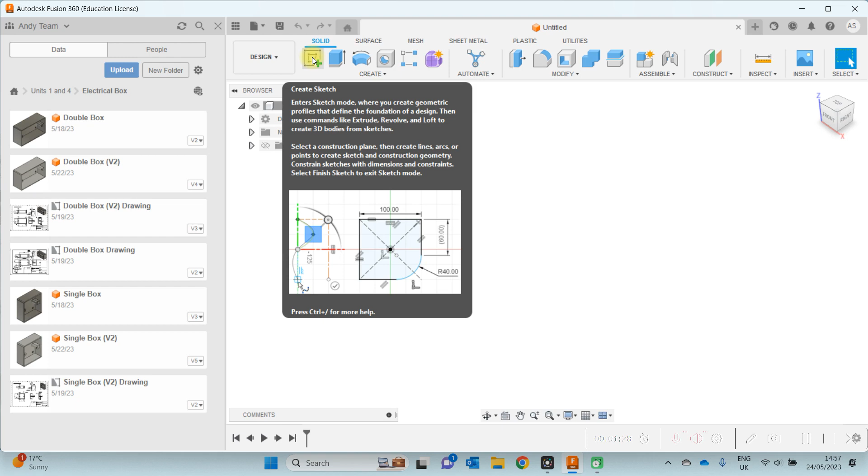So we're going to begin with the general outside geometry of the backbox. I'm going to be referencing the drawing as I go through this video, as I have the drawing in front of me here. So we're going to start with a sketch, and we're going to select a plane to sketch on. Now, with reference to the drawing, I know that the overall length of the backbox is 147 millimeters and the overall height is 50 millimeters. We'll look at the depth of the backbox in a moment.

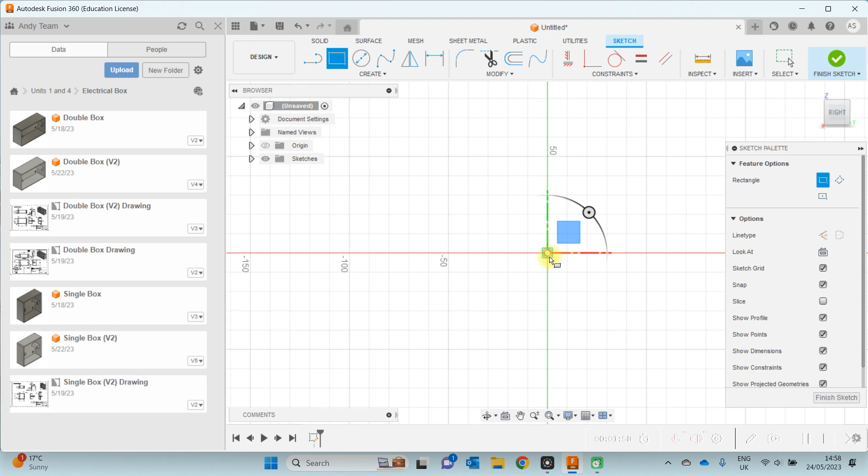Taking a rectangle then, I need to create a rectangle of length 147 millimeters. I type the dimension for the length in the box, and when I press Tab, I can input the dimension for the height, so 50 millimeters. Once I've created the outline for the front face of my backbox, I can click Finish Sketch.

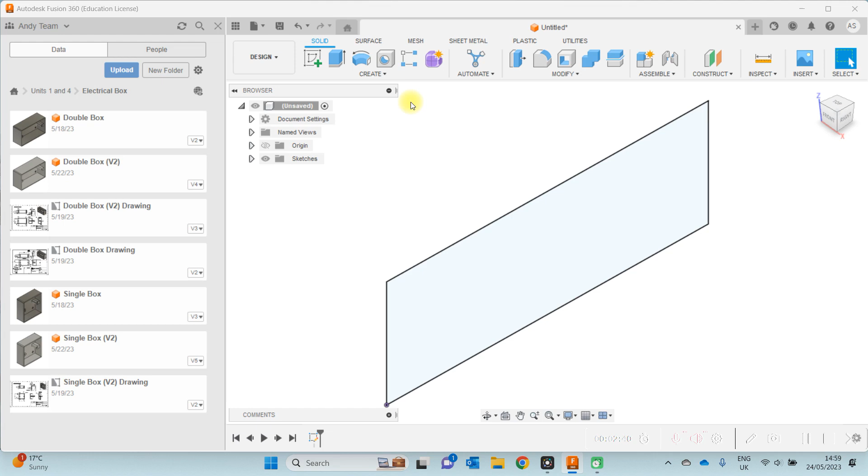Now the next step then is to extrude the thickness for the outside of our backbox. I'm going to use the extrude function, and I'm going to drag the arrow in the direction that I wish to extrude. Now with reference to the drawing, I know that the overall depth of the backbox in this particular view is 86 millimeters. So once again, I'm going to input 86 and hit enter.

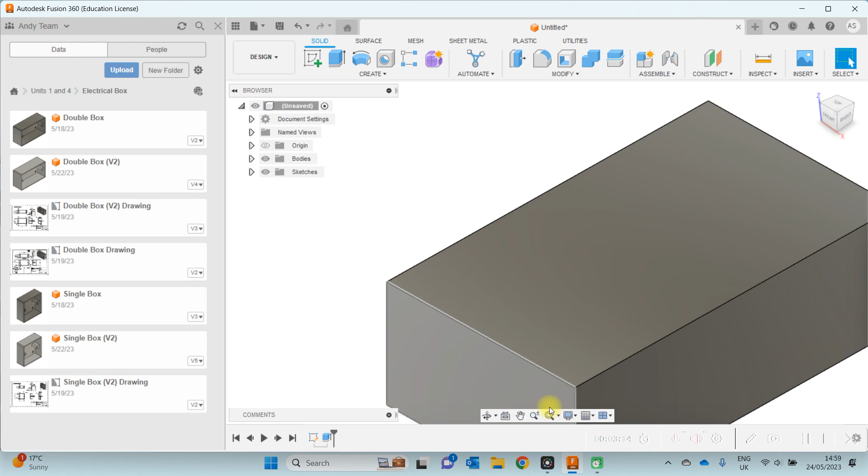So what we have so far is relatively basic, but it's the outside or the starting point for our electrical backbox. The next feature I'm going to do is add a thickness to the walls of this backbox, and there's a number of different ways that you can do this. One way might be to use the shell tool that we saw in the previous video, but I'm going to use an extrude cut function just so that I can demonstrate some other features as we go along.

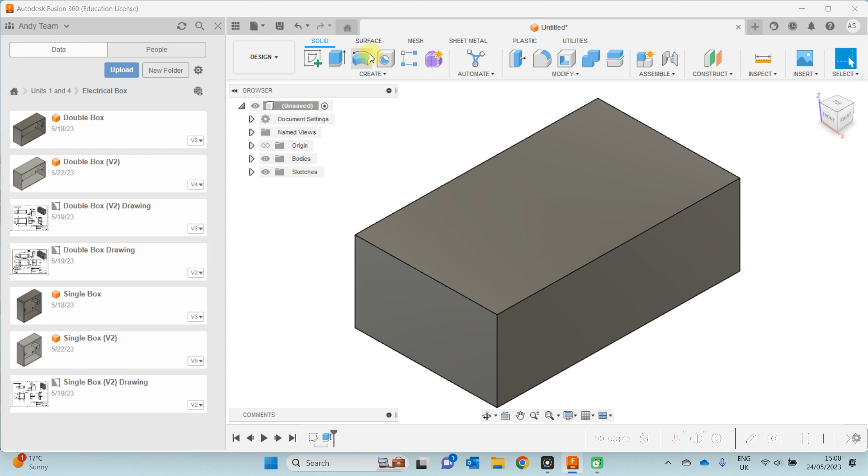So I'm going to sketch, and I'm going to sketch on the top face of the cuboid. And when we do this, you'll notice that the geometry reorientates. Now I'm going to draw a rectangle, and I'm not going to define any dimensions, so I can draw this anywhere in space. Because the important dimensions for me here are that we need to specify a thickness on each face of 3 millimeters. We're essentially going to create a 3 millimeter shell, but we're going to do this using extrude cut functions rather than the shell function.

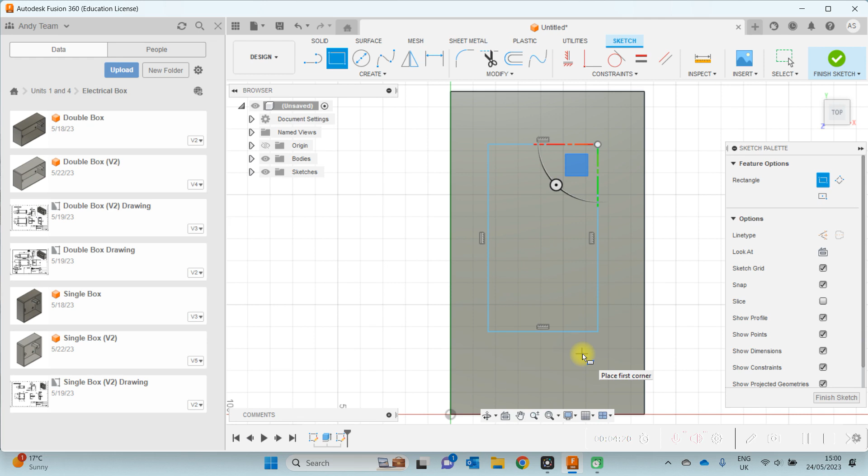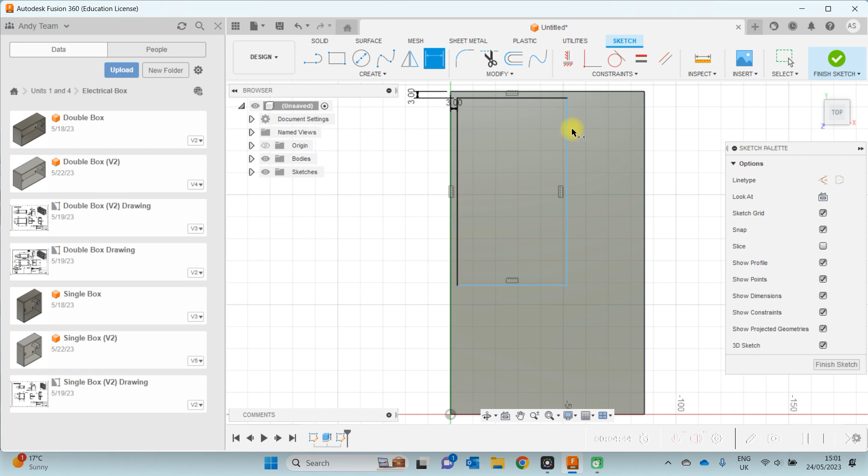So I'm going to dimension my first face, so between the side of the rectangle and the side of the electrical box, this distance here is 3 millimeters. I'm going to select the next face and the outside of the box, once again 3 millimeters, and I'm going to repeat that for the remaining two sides.

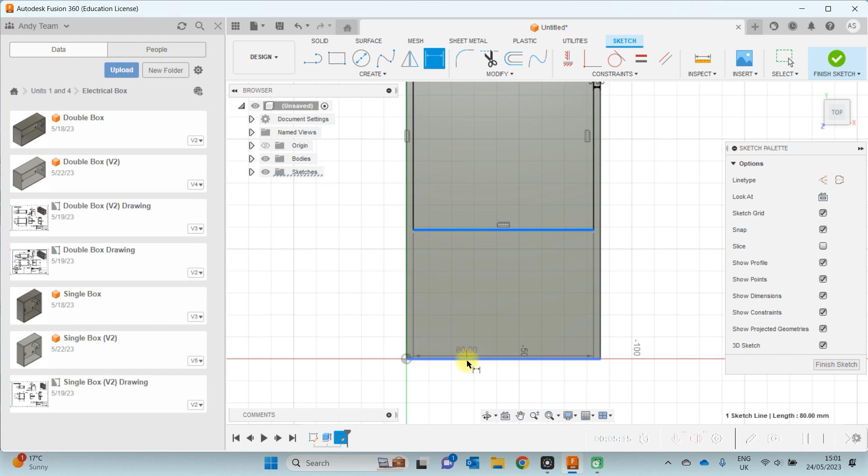Now it doesn't matter if your dimensions overlap the model that we're creating, as they're going to disappear once we extrude this object. So finally, I'm going to pan the object, I'm going to hit Escape to return to the previous tool, and I'm going to specify my final dimension.

Okay, now I'm going to finish the sketch because we've got a fully constrained rectangle there, and I'm going to orbit the shape so that we can see visually the sketched surface.

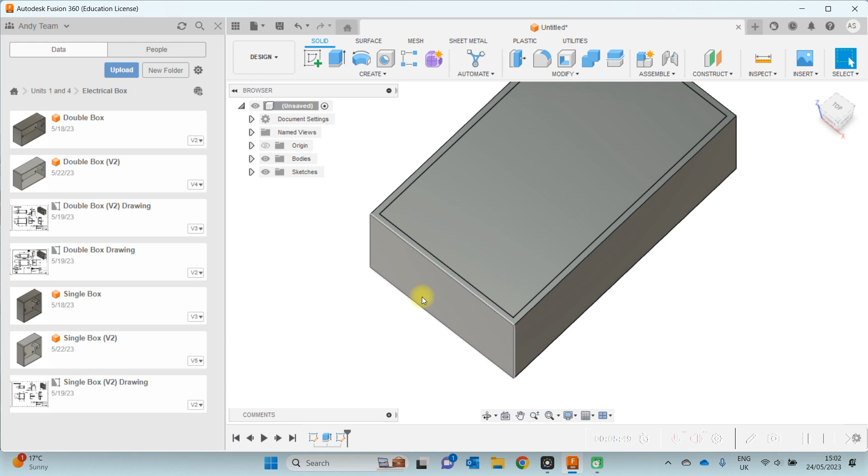Now the next function I'm going to perform is an extrude cut. If you recall, the height of this backbox was 50 millimeters, and we want to create a 3 millimeter wall thickness. Therefore, I'm going to need to extrude cut down by 47 mil. So I select my extrude tool, I switch from new body to cut, I specify the downwards direction, noting that we have a negative direction here, and I'm going to input -47 as my measurement.

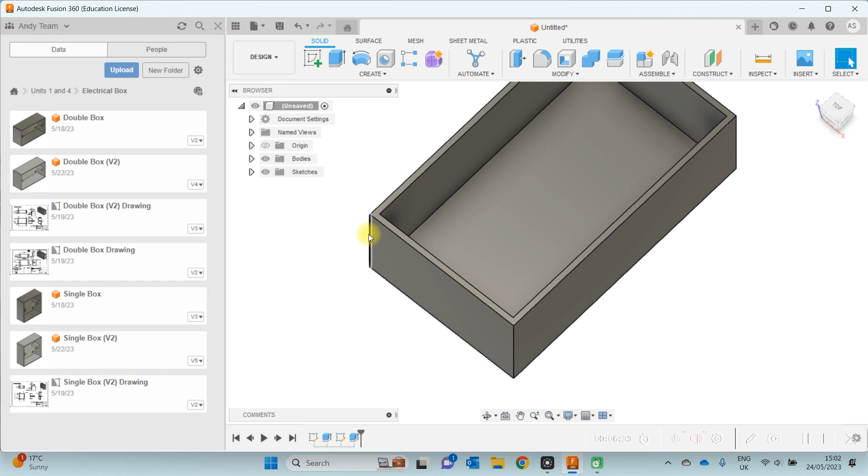So now we have the basis of our backbox. Now the other thing that I'm going to do here is add fillets to the 4 edges. These edges here, 1, 2, 3 and 4, currently out of view. These are the only 4 edges that we're going to fillet, but it means we get some practice using the fillet tool.

So I'm going to select the fillet tool, we have 4 edges as I mentioned. 1, 2. Just rotate the box. Press Escape to return to the fillet tool. 3, 4. And my fillet radius here is going to be 3 millimeters, once again labelled on the drawing for these 4 edges. So it's 3 millimeters, and then I can click OK.

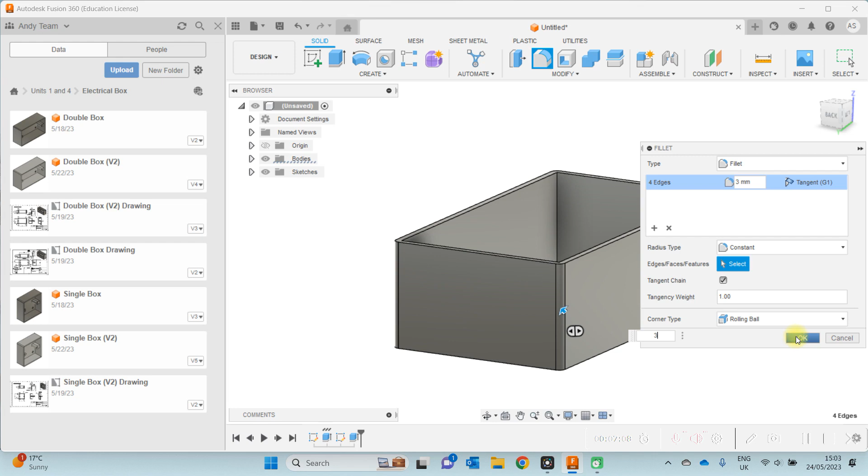So now we have our neat corners, or our filleted edges, removing the sharp edges there, or the sharp corners.

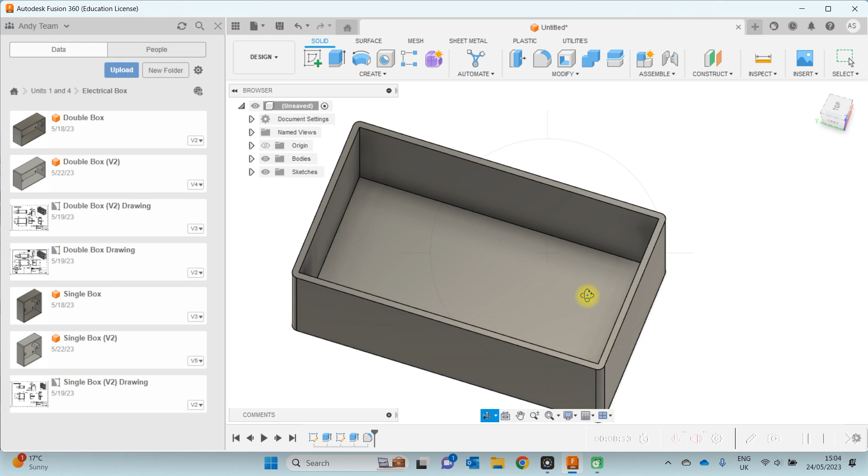Okay, now we have a number of other features that we're going to add to this box. And the next part that we're going to add are the pillars where the utility screws would go. Utility screws are used to secure the front of the electrical socket to the back box, but we're going to create some pillars here with holes so that we could allow for those screws to be placed into the back box from the front of the socket.

So once again, I'm going to create a sketch. This time I'm going to sketch on the inside face of our back box here.

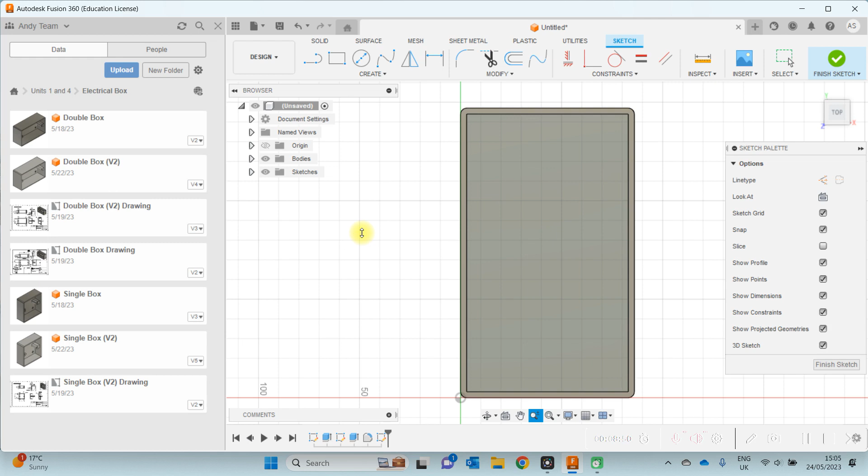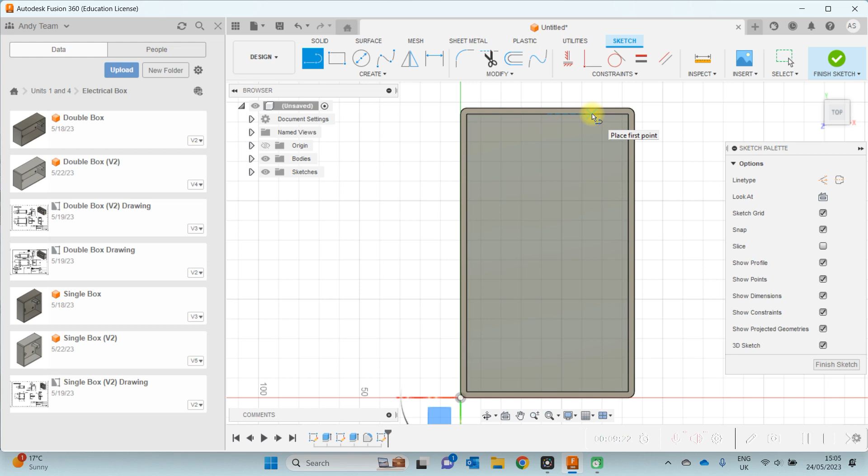Now, the next thing that I'm going to do is create a dummy center line. So I'm going to add a line, but it's not going to feature in our final sketch. On this edge here, I want to snap to the center of the edge. Now we have various different snap functions. When we see a triangle appear like so, we know that's going to snap to the center of that edge. You've got various other constraints and snaps here that you can use if you wish, but we're using the center line snap here, and I'm just going to draw a vertical line straight through the object.

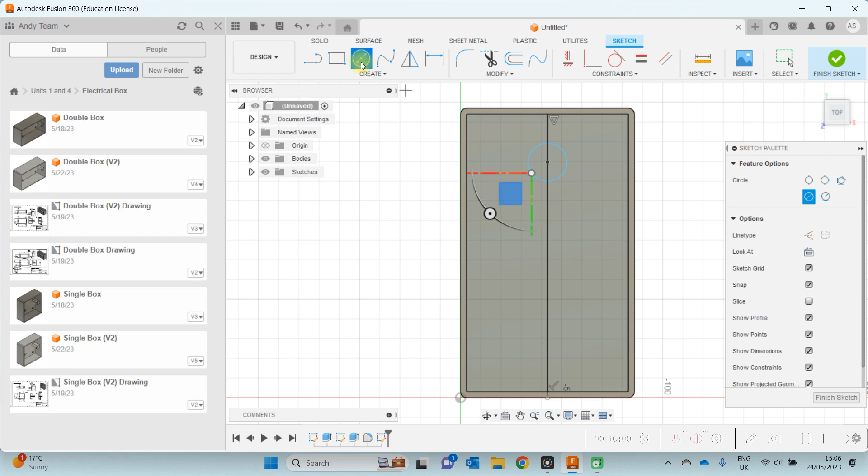So we know that that sits at the center of the shape. I'm then going to draw 2 circles, and both of these circles are going to have a center point on this line. Now, once again, we're not too concerned with the size of these circles at the moment, as we can dimension them afterwards. So they both have a center line here.

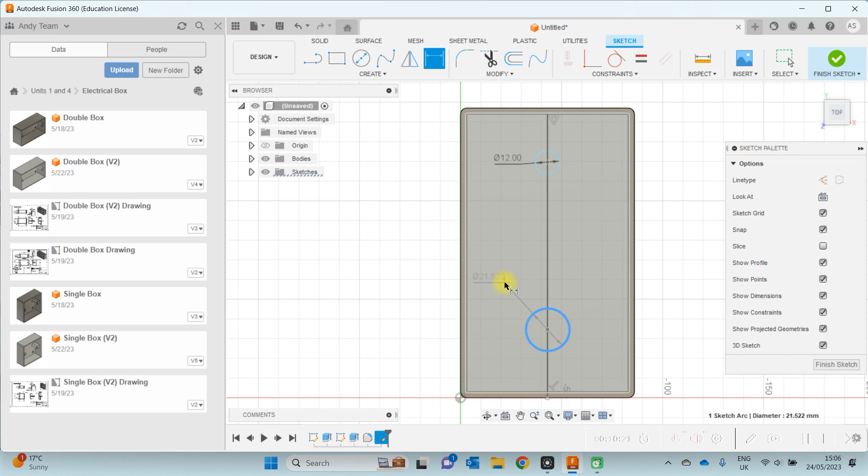Now, as I refer to my drawing, I can see that the overall outside diameter for each of these circles is going to need to be 12 millimeters. So using my dimension tool, I'm going to select the circle, 12 millimeters, then do the same for the other circle, 12 millimeters. The other thing we can see from the drawing is the distance from the outside edge here to the center of that circle is going to be 13 millimeters.

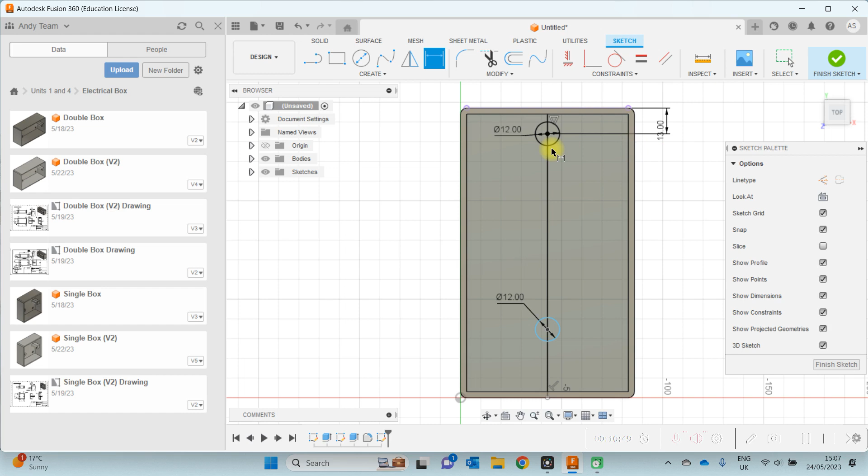So again, I'm going to take my dimension tool. I'm going to dimension from the edge. Note that this is the outside edge to the center of the circle, and I'm specifying that as 13 millimeters. I'm going to repeat for the other side. We have the outside edge to the center of the circle, 13 millimeters.

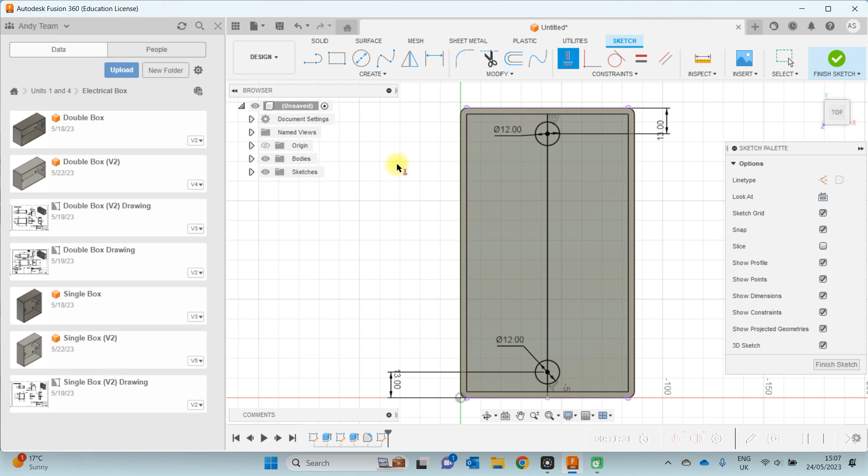Now, the last thing that we need to do is connect the tangent of this circle, and we need to connect it at a right angle to this line here. Now, there's various different ways of doing this again, but I thought it'd be useful to use some of our constraint tools. Let's pan in on the first circle so that we can see what we're doing here.

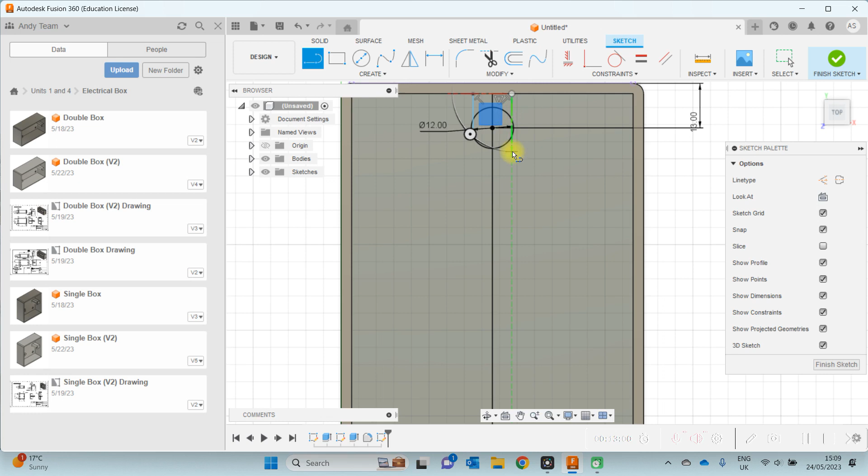So we're going to start with a line that's on the tangent of the circle, and we can ensure this in a moment, and it finishes on the outside here. And we can do the same on the other side. Now, what you'll notice at the moment is although we have a right angle here, so we know the line is perpendicular to our baseline here, we don't have a tangential constraint here. As we don't have a tangential constraint here, we can see that that line doesn't touch the outside of the circle. Let's once again move in a little bit closer so you can see this clearly.

When we apply the tangential constraint, we select the constraint, then select the line, and select the circle. We can see that in order for both conditions to be true, a right angle here and a tangential line here, the line has been moved to the outside edge of the circle.

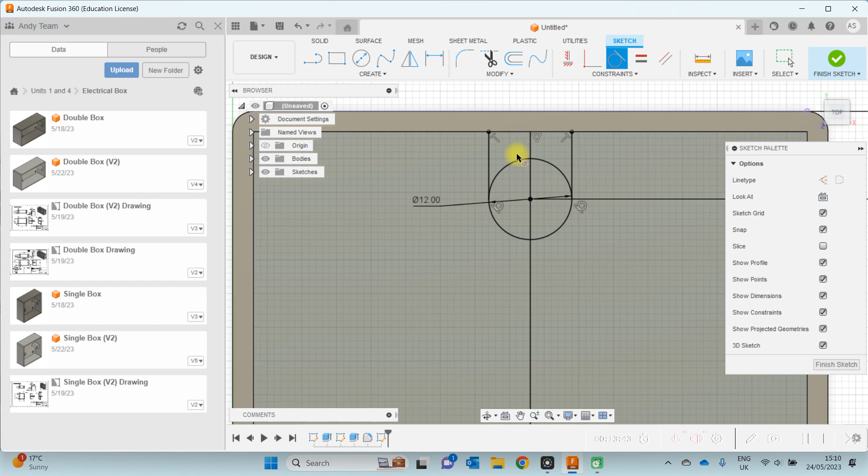We'll see that again here. We select the line and we select the circle. Now all of our conditions have been met for that pillar or the sketch of that pillar. Let's repeat on the other side.

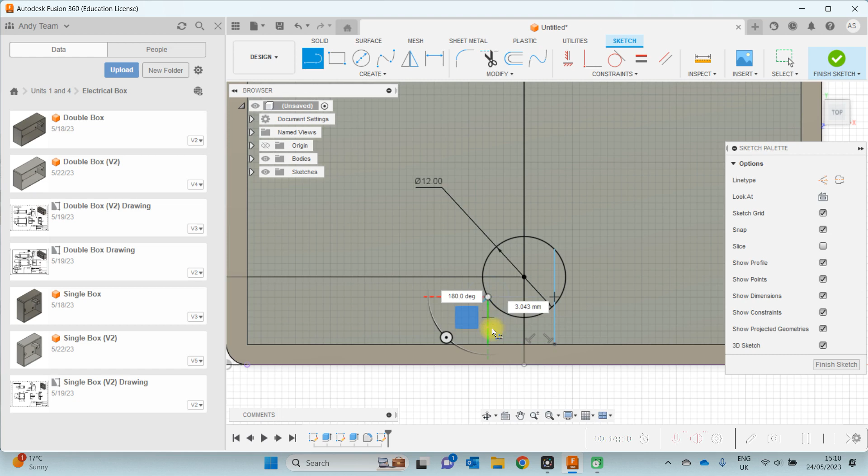We know that we want the lines to be tangential to the circle, and we also want them to be at right angles to the baseline. We can click anywhere on the circle because our constraint will fix that afterwards, but we want it to be at right angles like so. And again, anywhere on the circle, at right angles like so.

Then using our tangential constraint, we click the line, we click the circle, and it fixes that constraint for us, like so.

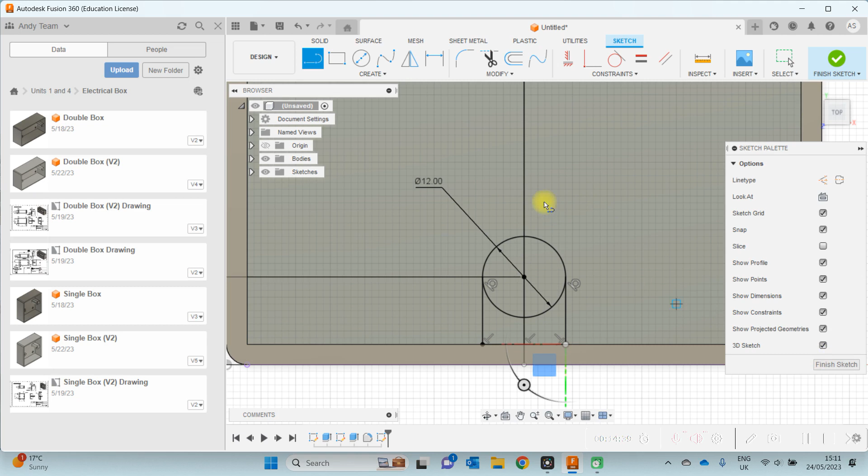Now I'm also going to add a line from each of the corners of the lines that we've just produced, so that we have a complete sketch. You'll see why we need that in a moment. I need to do the same at the other end, again so that we have a complete sketch or a closed profile, if you like. Finish.

The next function we're going to perform is an extrude. When we refer to the drawings, these pillars do not go all the way to the top edge. In fact, the finished height from the outside face of the back box is 43 millimeters. Don't forget that the thickness of this back box is already 3 millimeters.

So we only need to add a further 40 millimeters. The end result is we're going to have a 7 millimeter recess between the top edge, or the front face here, and the front face of the pillar. Again, if you refer to the drawing, you'll see this more clearly.

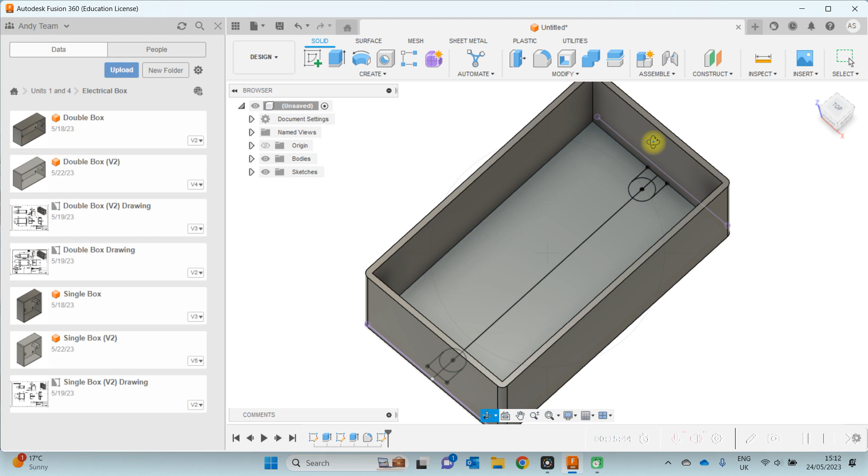But I'm going to do each of these extrudes together. Need to make sure I select all of the profiles that I wish to extrude. 4 faces there. Going to do the same on the other end. 1, 2, 3, 4. And I'm going to extrude.

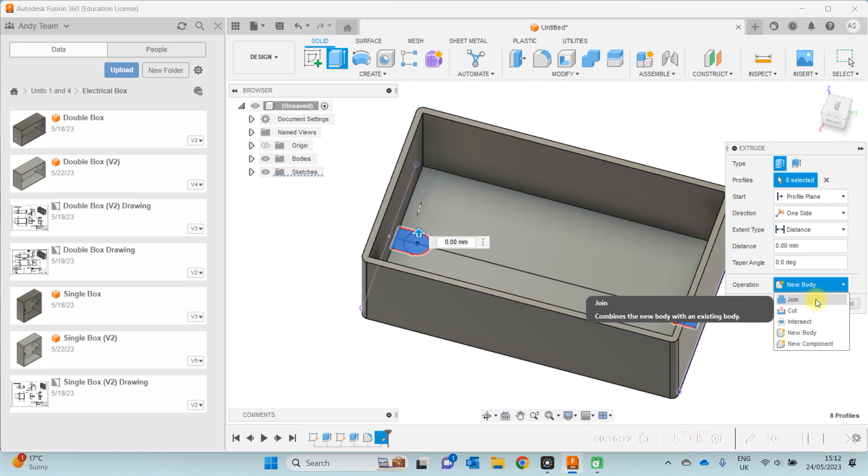This time I'm joining material, so rather than new body, I'm going to specify join, because this is going to join to our existing box. And for the reasons mentioned previously, this needs to be 40 mil.

What we end up with then is a 7 millimeter recess here between the front face of the box and the top face of the pillar.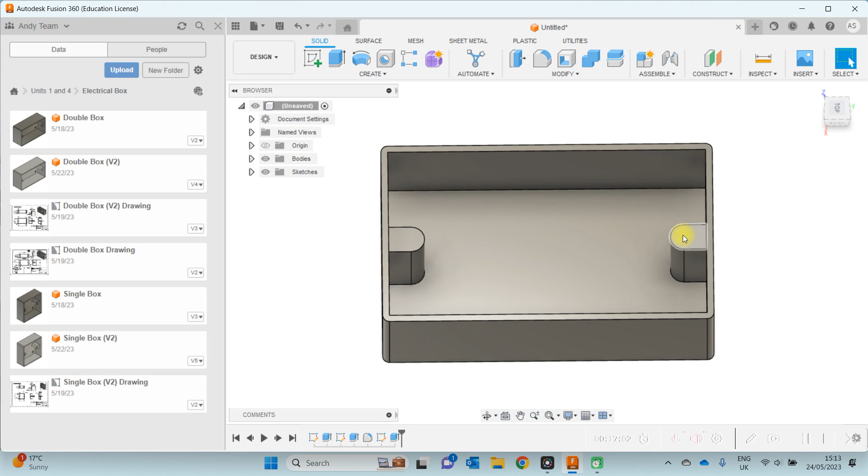Now, the other thing we've not yet done is we haven't shelled the inside of each of these pillars. We could use the shell function to achieve this, but I'm going to do this using extrude cut because I want to show you how you can apply an offset to an extrude cut. So we need to sketch on face again.

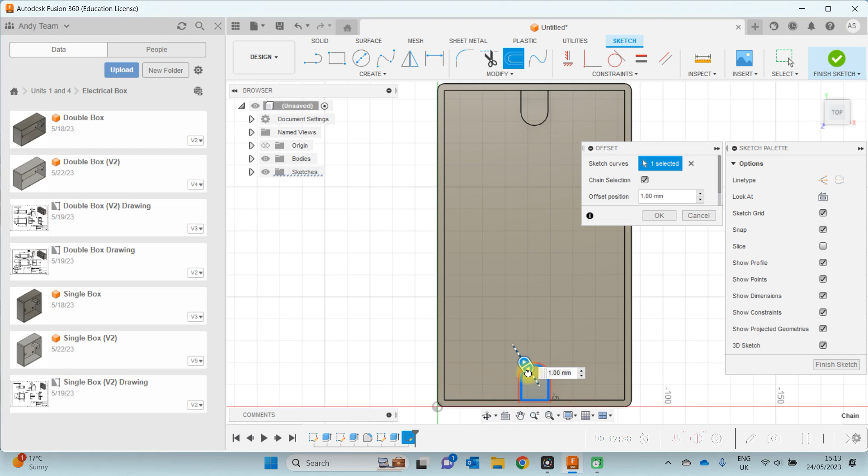If we use the offset tool and we select our first curve, we can now specify an offset of 3 millimeters. Note that we have a minus here, we need to take care with that, so we have minus 3.

So let's continue. And what you'll notice at the moment is we've offset each edge of that particular feature.

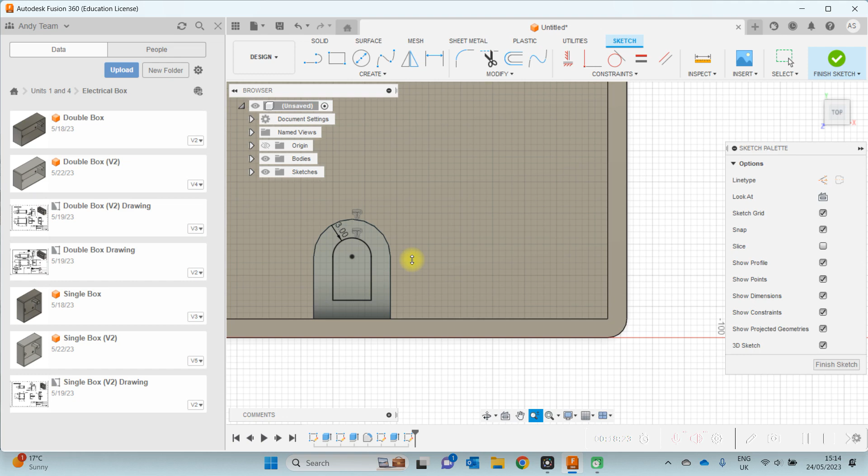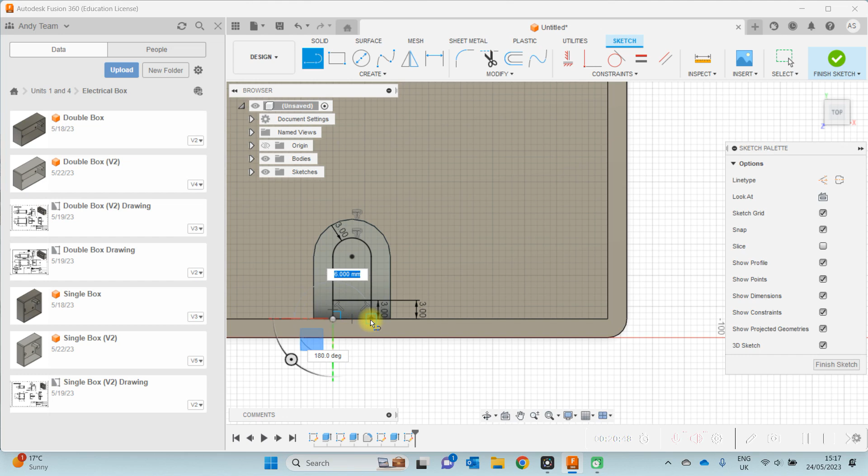So I'm going to add a few extra lines on here. Going to add a line 3 millimeters in this direction, so that meets the wall. I'm going to add a line 3 millimeters from the other side, so that it meets the wall. And then I'm going to close off the profile. Okay, let's finish the sketch.

So we have everything we need here in order to perform our extrude function. I'm going to pick the 2 faces that I wish to extrude, and I'm going to orbit this slightly so we can see what's happening.

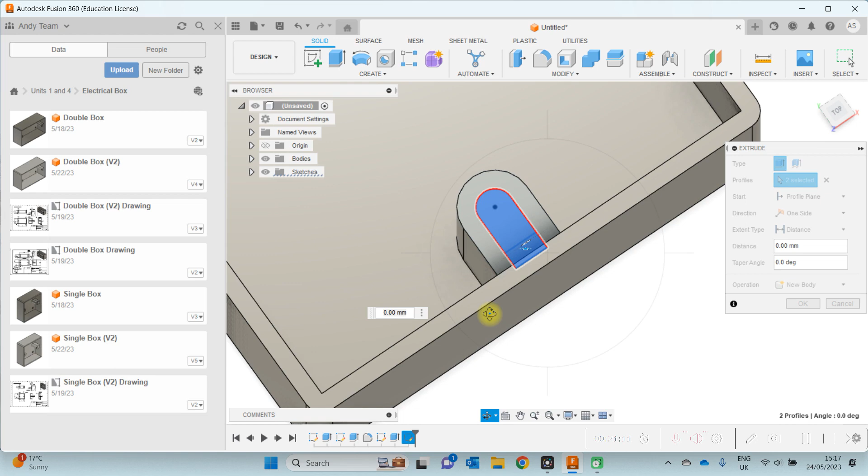Now, we want to cut material out for this pillar, but what we don't want to do is cut from the top surface. We want to offset the cut by 3 millimeters, so essentially we're going to have a 3 millimeter shell throughout the inside of this particular component, or this pillar.

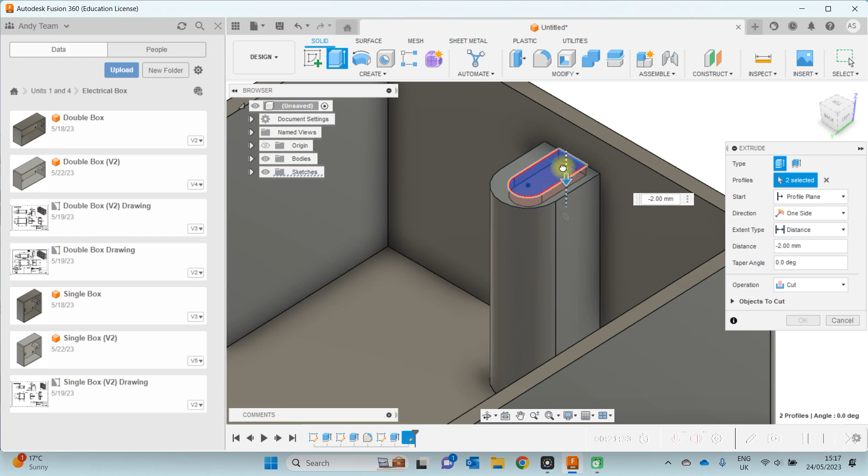Now, the way that we do this is we select our cut function, we specify our direction. The direction here is unimportant so long as it goes the whole way through the box. So we'll set that to 53 millimeters, knowing that the box is 50 millimeters deep.

But where we have this start position here, we're going to specify that we're going to start at an offset. Now, the offset is going to be 3 millimeters.

Just take care here, because when we've inputted 3, we notice that it's 3 millimeters above the face, whereas we want it 3 millimeters below the face. Again, this is because of our positive and negative directions. So let's specify -3. It drops below the surface.

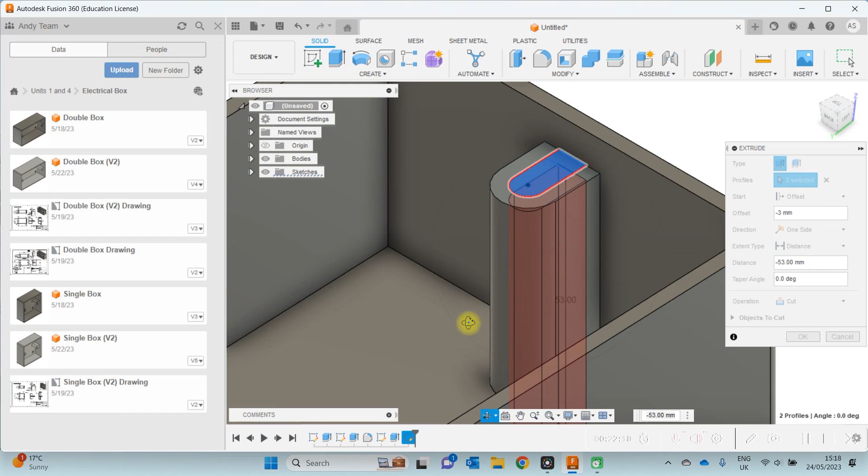We can see that in the preview, and it's going to cut all the way through the part. That's exactly what we want. Let's click OK.

It doesn't look as though anything's changed, but if we look at the underside of our part, we can see that it's shelled that pillar, but we've still got the thickness of the material on the top face.

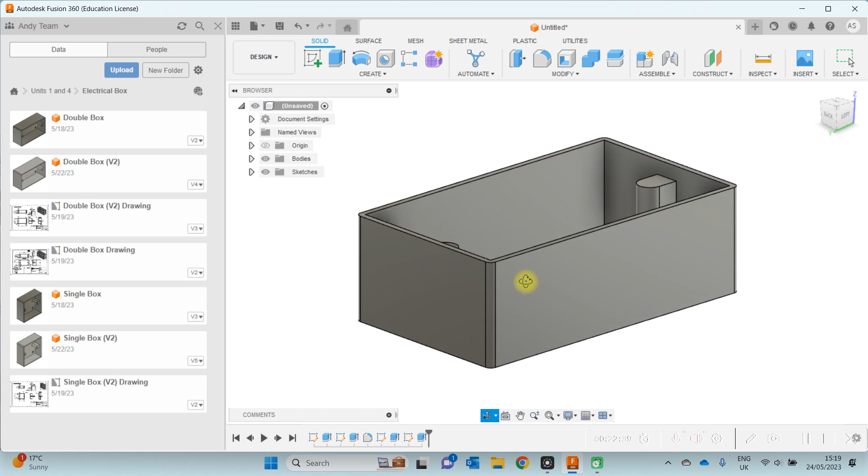Let's just repeat everything we did there for the other pillar.

So we're going to sketch on the top face there. Zoom in. First thing we did was offset the outside edge.

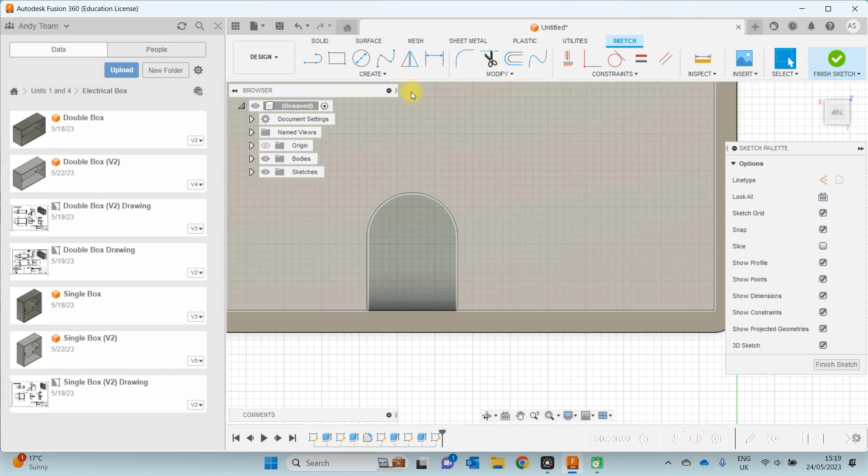We offsetted 3 millimeters to create our thickness, noting that we need to type -3 because it's the negative direction.

We then extended each of these lines to the edge of our box. There is an extend function, but for simplicity, I'm going to use the line tool.

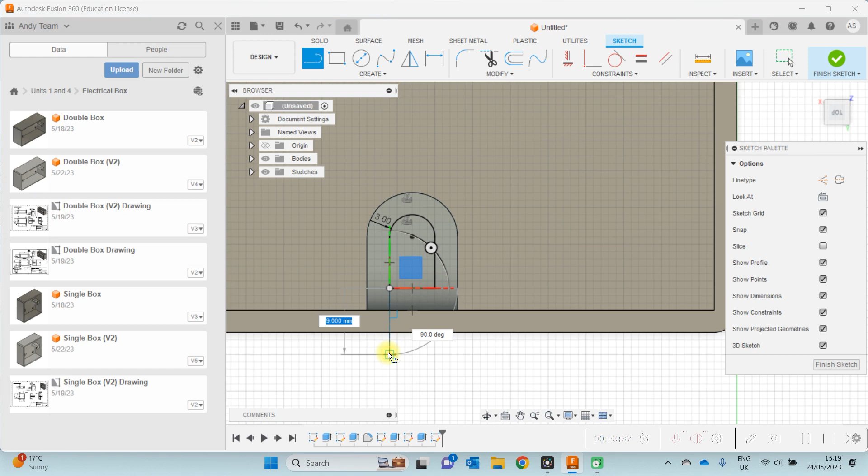And we need to remember to close off that profile. We can then finish the sketch.

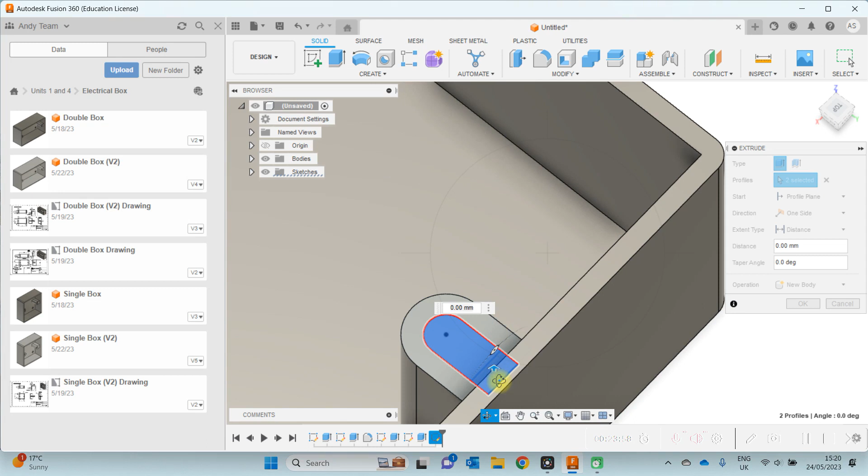We can extrude, select our two faces, orbit so we can see what's happening, pan and hit escape. We're performing a cut.

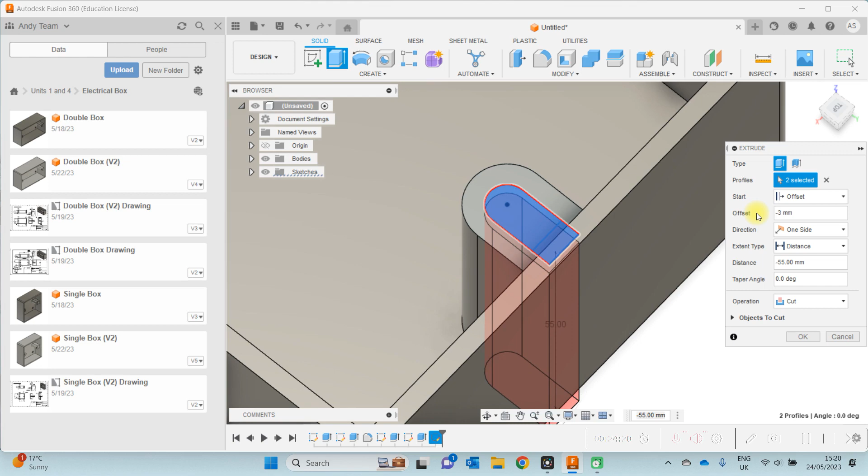We're performing a cut in the negative direction to at least 55 mil, but we're applying an offset, and the offset is -3 millimeters because it's 3 millimeters downwards. Okay.

Now we can see that what we have is everything we required. We have a 3 millimeter shell on the top face, and the rest of the material has been removed underneath.

Now to complete these pillars, we're going to cut a hole of 5 millimeters in this pillar and a hole of 5 millimeters in this pillar, and we're going to align that with the center of the previous circles. As mentioned previously, this would be to allow for the fixing for our utility bolt.

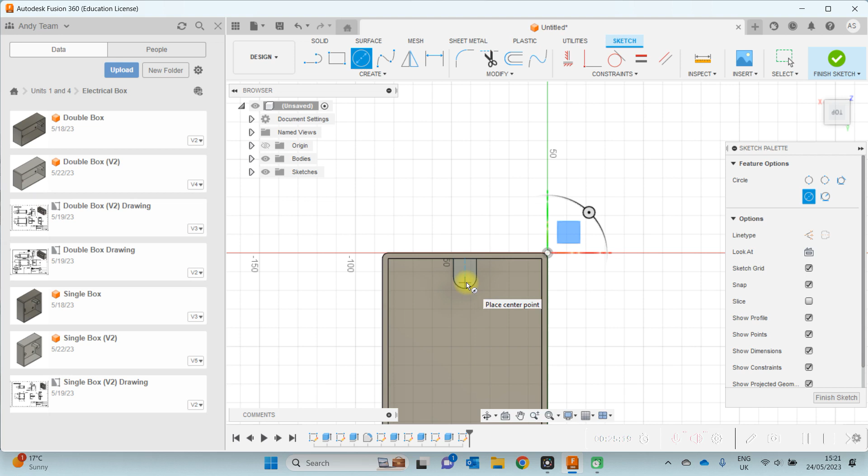Let's sketch on face. This is a relatively quick operation. We need a circle which shares the center we had previously. Diameter 5 mil.

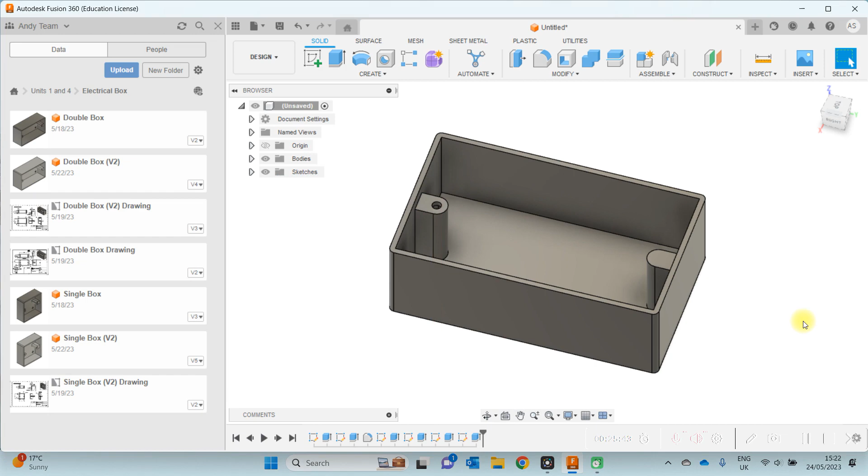Finish sketch. Extrude cut. It only needs to go down 3 mil, but we can go further. Okay. Same for the other pillar.

Top surface. Circle 5 mil. Finish sketch.

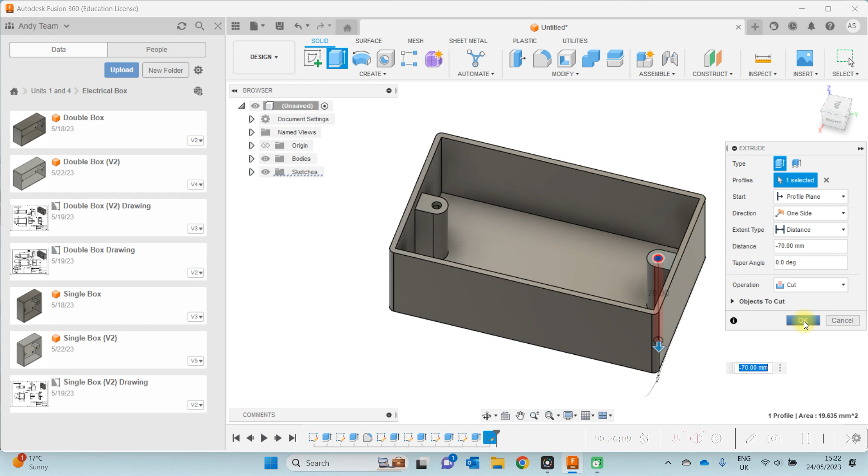Extrude cut. Again, so long as the depth is over 3 millimeters, that will remove the material for us.

Okay, let's have a look, and we're going to use our viewing planes in the top right corner. We're going to have a look at the top face. So we can see that each of those holes are cut right the way through the pillars.

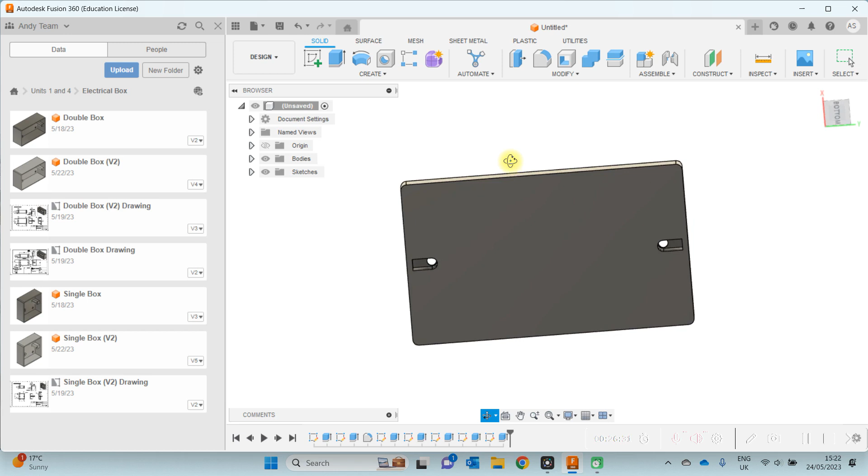If we orbit that round, then from the underside, we can see that we still have the shell thickness on the top face, but we can see that we have a cutout that goes through the face that's 3 mil thick.

Now we've completed those two features. We have 4 features remaining, and they're identical, and they're for the screw holes in each of the 4 corners of the back surface of the box.

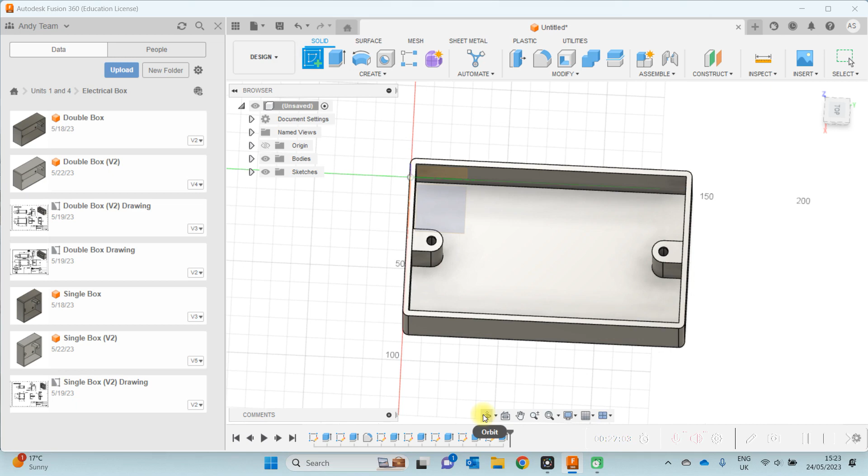So let's sketch on face. Just make sure it's selecting the inside face, like so.

Now, once again, we could draw one of these at a time. We can use something called a pattern, and we could apply that pattern to the sketch or to the extruded geometry. But I'm going to produce these using the standard sketch tools to give us an opportunity to have more practice with those.

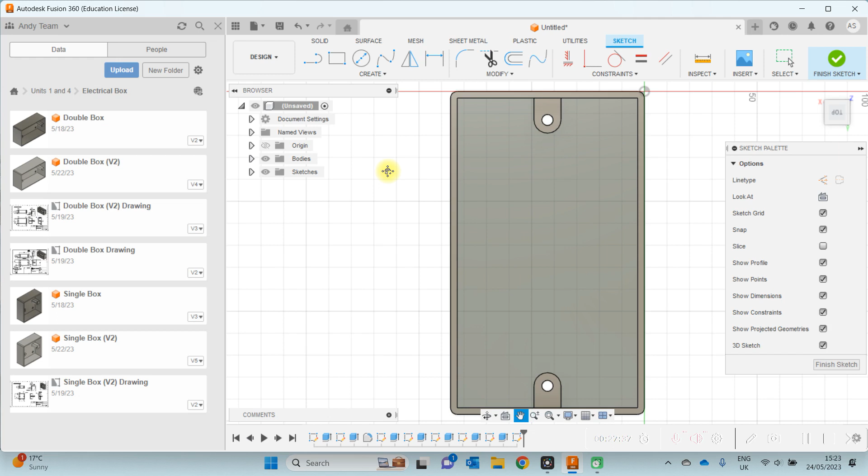So I'm going to draw 4 circles. And these circles can be anywhere in space for now. Each of these circles is going to have a diameter of 5 millimeters. So let's use our...

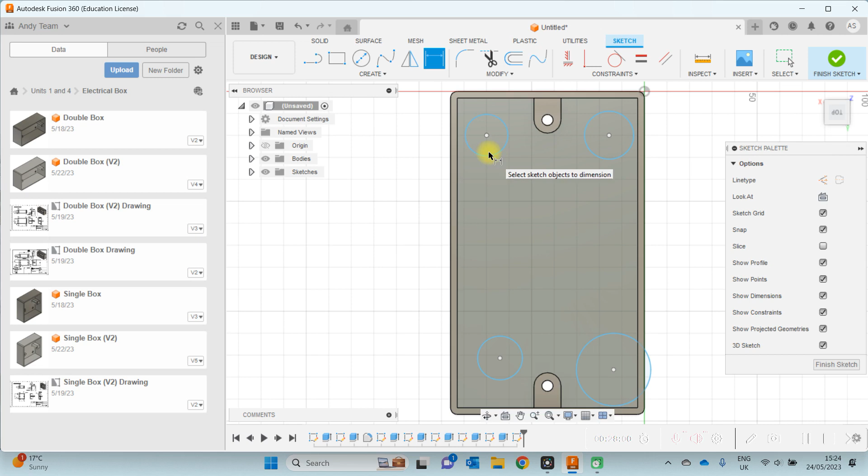Dimension tool, dimension each of those.

And then we need to position the centres of each of these holes. The centres of each of these holes are 13 millimeters from the outside edges of the box.

Now again, I appreciate there's quite a lot of repetition here, but what I want to do is give you an opportunity to practice using these tools. 13,

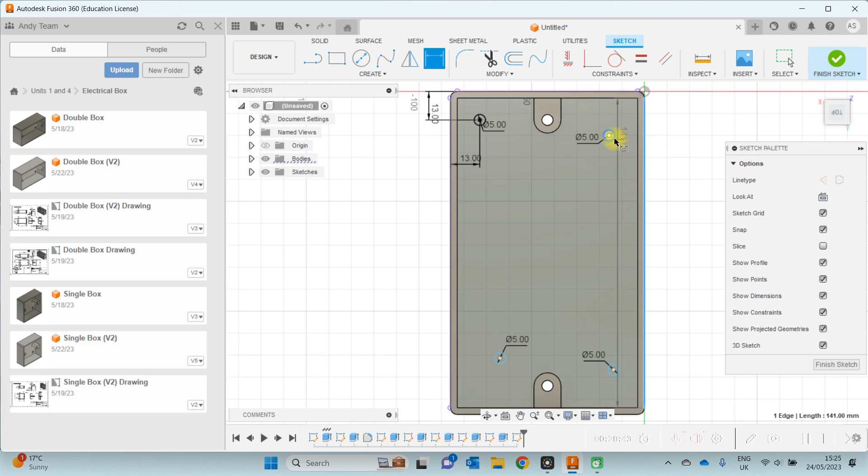13. We do each circle in turn. Again, the dimensions can overlap the model.

And the last one, outside edge to centre, outside edge to centre, like so.

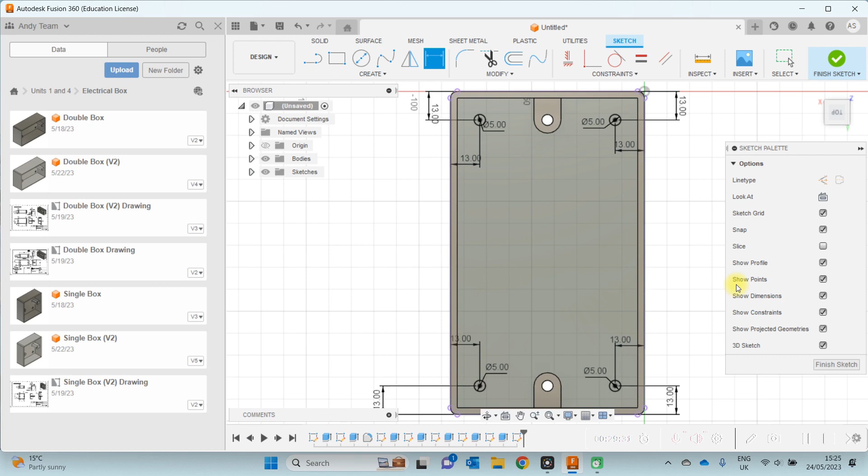Now we're going to perform an extrude cut, and we're going to cut down into the bottom face of the box. However, we're only going to extrude through half the thickness. You know that the overall thickness is 3 millimeters, so we're going to extrude through a depth of 1.5 millimeters. Let's finish our sketch, extrude,

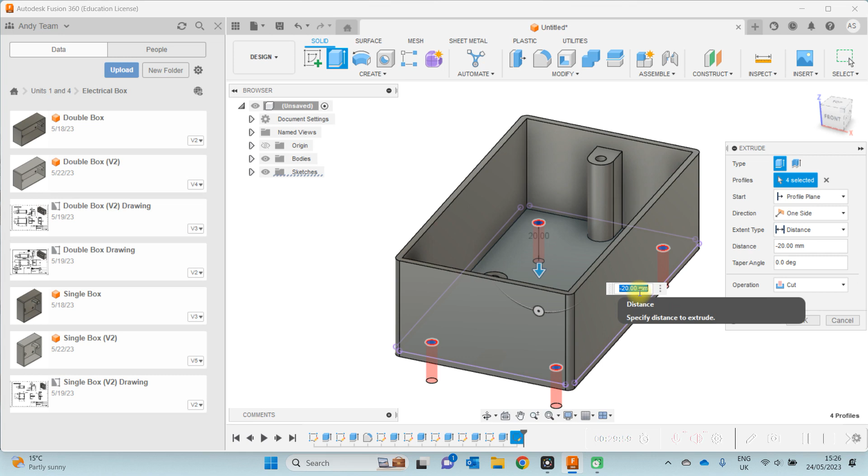and pick our 4 circles. Now once we've picked our circles, we can orbit so we can see what's happening here. Okay, this all looks fine. We're performing a cut. We're cutting downwards, and we're cutting downwards by 1.5 millimeters. So minus 1.5 is the dimension.

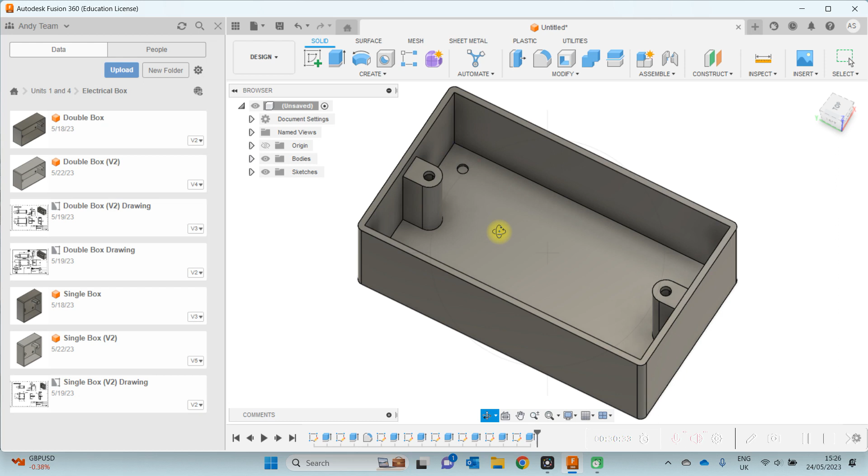Okay. The next thing we're going to do is apply a chamfer to each of those circles. Essentially, we want to create a 45-degree angle that would support a countersink screw. So the top edge of each of those circles is going to be chamfered at 1.5 mil. We have a chamfer tool, modify, chamfer.

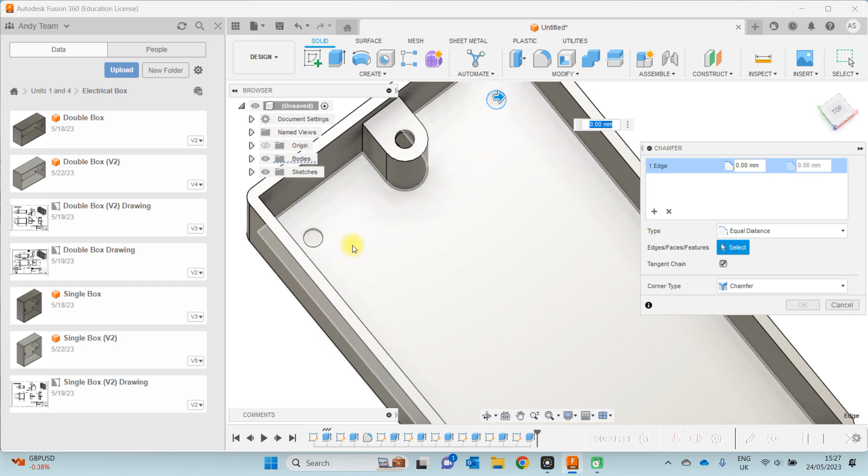We're going to pick the edges as mentioned. So the edges are top edge here, top edge here, top edge here, just make sure that it's the edges that you're selecting rather than the face, and the edge here.

We can check because in our sidebar here it tells us we have 4 edges, and we're going to specify 1.5 millimeters. We've also specified the type is equal distance. Now if we look at the preview of each of those features, we can see that it's done what we wanted. We have 5 millimeters at the bottom of the cutout, and we have 1.5 by 1.5 or a 45-degree chamfer. Let's click OK.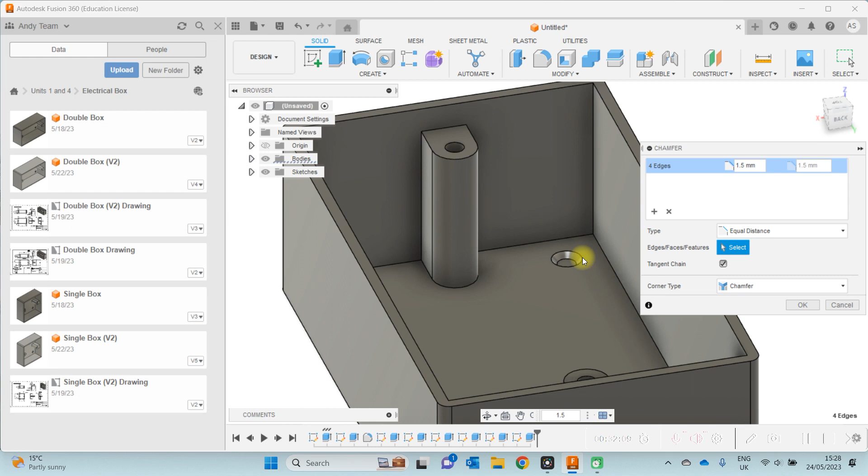Now the final part then is to continue the circular cutout on the bottom face, the 5 mil cutout, and we're going to go through, but not all the way through the material. We're going to go through another 1.25 mil. Essentially, we're going to leave a quarter mil skin on the underside.

Now, if you've seen these back boxes, they'll have a breakout section so that you can break the holes out just for the places where you want to input the screws. Now, let's do each of these again.

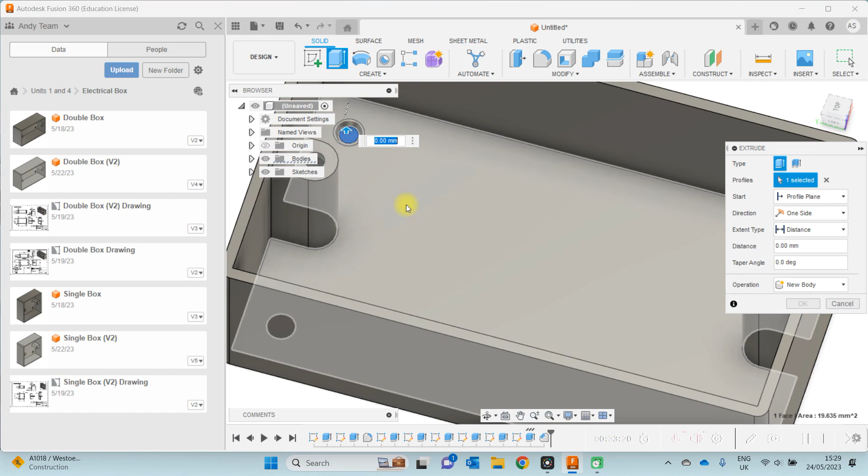So we're going to select them all at once. Going to select extrude cut and select the 4 bottom faces of each of those circles or each of those cutouts. So we have 1, 2, again orbiting the object, 3, and the final one, 4.

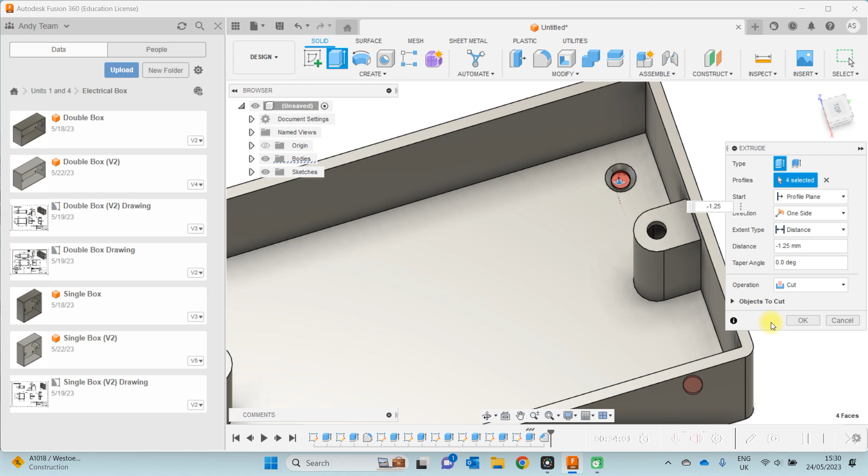We're going to extrude cut, and our depth, as previously mentioned, is minus 1.25 millimeters. So not quite through the full face of the part. Okay, so now when we orbit that part, we can see that we have an additional cutout that doesn't quite break through the back of our component.

Okay, so now that we've created our component and we've created our features for the pillars and for the screw holes, the last thing that we need to do is assign the material to this particular component. Once we've assigned the material, we can check the volume and the overall mass of the electrical back box.

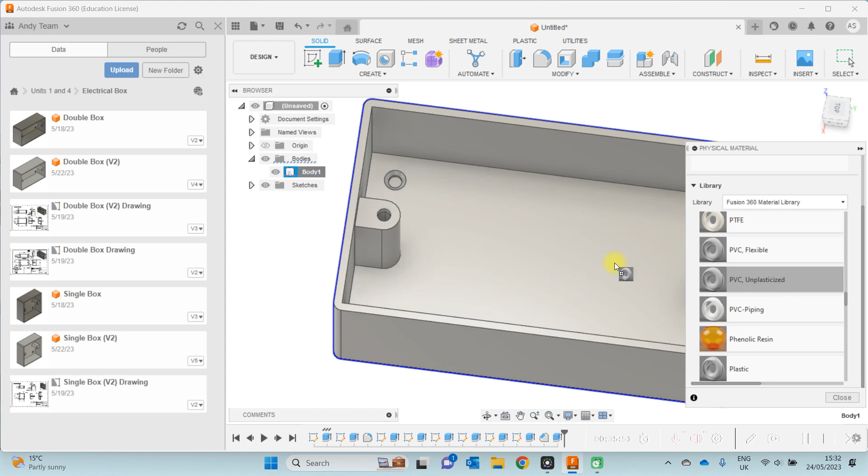So if we expand the bodies menu, there's only one body. The first thing we're going to do is right-click Physical Material. And the material that we're going to assign to this component is UPVC. Now UPVC is unplasticized PVC, and essentially it's a hard, rigid version of polyvinyl chloride. So in this list here, we're looking for UPVC. So here we have PVC unplasticized, or UPVC, and we can assign that material to our component.

So to finish then, we can right-click on our body and we can select Properties. We can see here that the volume of our component is 1.093 times 10 to the 5, where 10 to the 5 means we move our decimal place 5 places to the right. So we have 109,300 millimeters cubed.

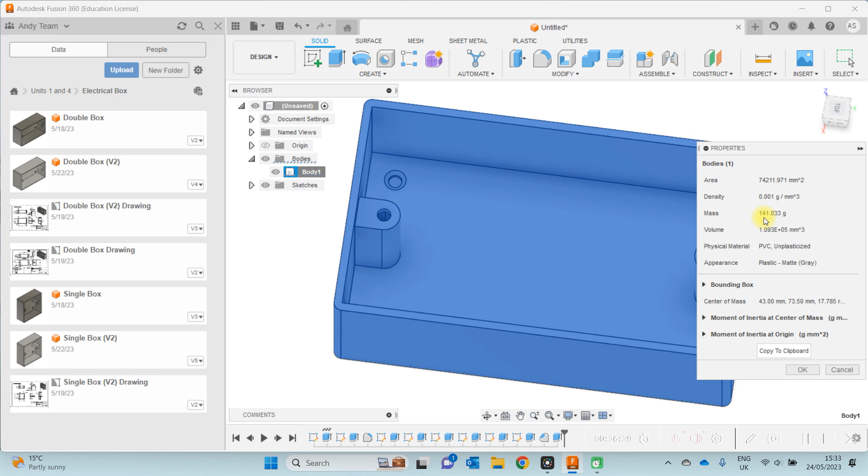Once again, we can see that our material is specified as UPVC, and we can also see the mass of our component as 141.033 grams. So we have the material assigned, we have the volume, and we have the mass of that electrical back box. So I hope you found this video useful, and thanks for listening.